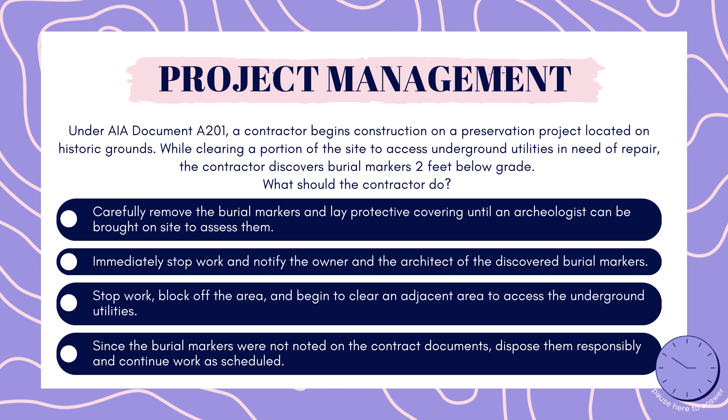And the answer is immediately stop work and notify the owner and architect of the discovered burial markers. As stated in AIA Document A201, the contractor must immediately suspend any work that would affect burial markers and notify the owner and architect. The owner will then need to obtain governmental authorization to resume construction.

The contractor is not allowed to start work until instructed by the owner. But that doesn't mean that they stop all work. The contractor is able to continue work in areas that are not affected by this discovery. This provision also applies to the discovery of human remains, archaeological sites, and wetlands not indicated on the contract documents.

Next up is programming and analysis. In a city where summers are characterized by high temperatures, a new office building aims to reduce energy consumption by utilizing natural ventilation and shading elements. What passive climatic design strategy should the architect recommend in this scenario?

Installing energy-efficient HVAC systems, constructing a green roof with vegetation, incorporating operable windows and sunshade devices, using thermal mass materials for building construction. Pause to answer.

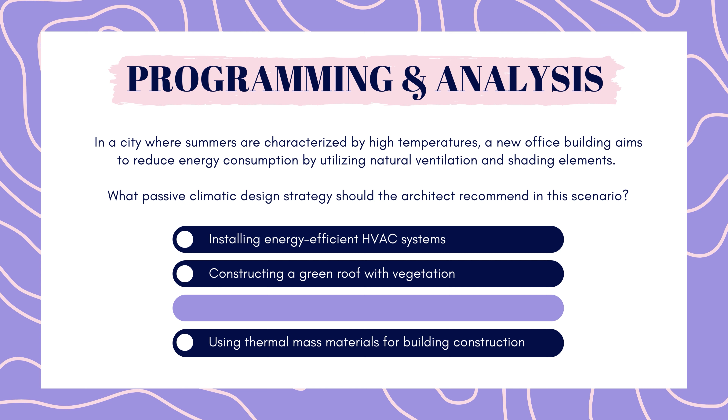And the correct answer is incorporating operable windows and sun shading devices. For this question, we're set in an area with high summer temperatures, so implementing passive ventilation and shading will aid in the occupant's comfort and in reducing the building's reliance on mechanical cooling systems.

Using operable windows will allow for natural ventilation, facilitating the flow of fresh air through the building to cool indoor spaces. Sun shading devices such as external louvers, shades, or awnings help to block direct sunlight, reducing solar heat gain and keeping interior spaces cooler.

Installing energy-efficient HVAC systems is great and will help reduce energy consumption, but it is not a passive system. Constructing a green roof with vegetation and using thermal mass materials are both passive design strategies, but they do not address natural ventilation or shading as asked for in the question.

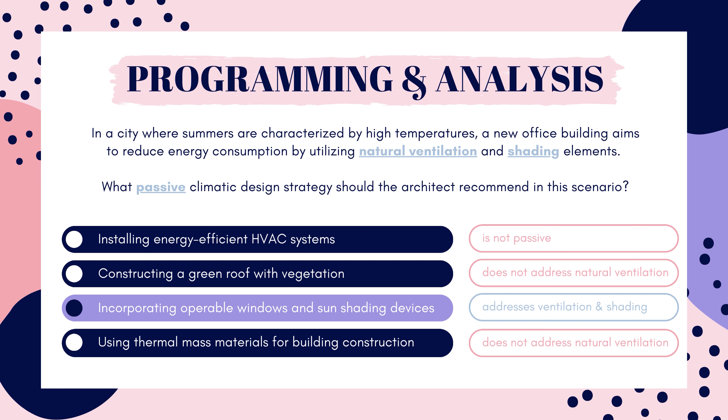Therefore, our answer of incorporating operable windows and sun shading devices is the best option, since it is a passive design strategy and addresses both natural ventilation and shading elements.

Our project planning question is, for a high security facility requiring robust door security mechanisms, which lock set would be most appropriate? Mortise lock set, pre-assembled lock set, bored lock set, or interconnected lock set? Pause here to answer.

And the correct answer is mortise lock set. Mortise lock sets are known for their robust security features and durability. They are designed to fit into deep pockets within the door, providing a strong and secure locking mechanism. They are also more complex in design compared to other lock sets, featuring multiple internal components and sturdy construction, which makes them more resistant to tampering or forced entry.

Clients also like this lock set due to its ability to be customized. They allow for various functions and configurations, including different cylinder options, multiple locking points, and the possibility of integrating additional security features. So for this scenario of a high security facility, mortise lock sets are typically used.

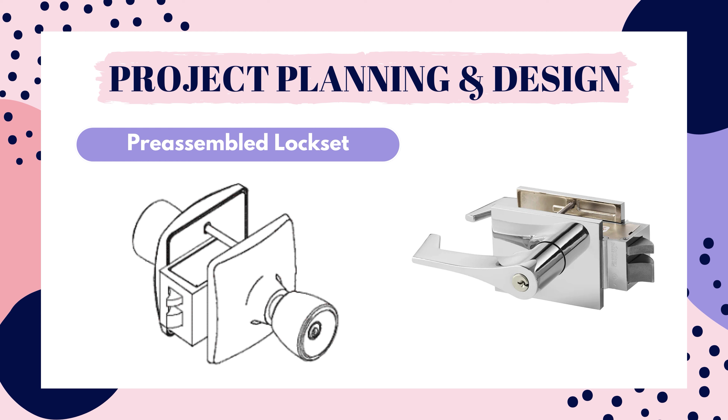Pre-assembled lock sets are convenient and easy to install since they come fully assembled and ready for installation, but they are not as durable and secure as the mortise lock set. A bored lock set refers to the way the lock set is installed. The contractor bores a hole into the door and installs the lock mechanism. These lock sets are less complex and do not provide the same level of security and durability as mortise lock sets for a high security facility.

Interconnected lock sets are just as they sound. It combines two separate locks into a single integrated unit. They typically consist of a lever handle and a deadbolt. This lock set has less customization and is not as durable as the mortise lock set.

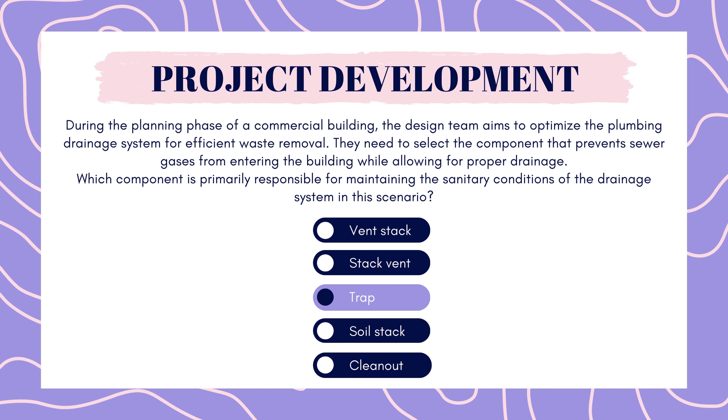And the correct answer is trap. Traps are essential components in plumbing drainage systems designed to create a water seal that prevents sewer gases and odors from entering the building. You may have found yourself annoyed with the windy pipes below your kitchen sink that prevent you from storing cleaning supplies in the cabinet. Well, that is a trap. As annoying as they are for storing items, they actually keep your house from smelling stinky.

They work by retaining water in a bend or a U-shape in the pipe, creating a barrier that prevents gases from backing up into the building while still allowing wastewater to flow through.

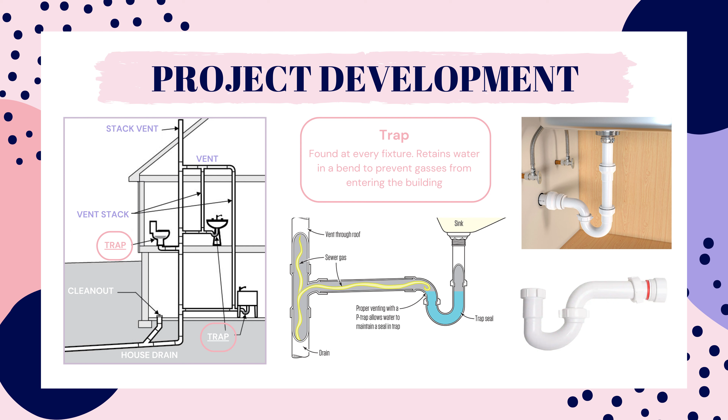A vent stack allows air into the drainage system to prevent siphoning of water from traps and ensuring smooth drainage. Remember, siphoning is when a liquid is pulled up due to pressure differences at different ends of the pipe. Vent stacks are crucial for plumbing systems, but they do not prevent sewer gases from entering the building.

Similar in name and function is the stack vent. This component also allows air into the system, but it is the pipe that you see poking out through the roof.

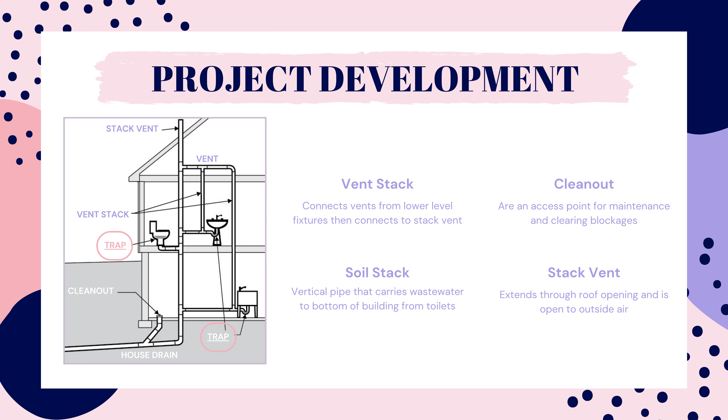Just like the stack vent does not prevent gases from entering the building. Soil stacks are vertical pipes that carry wastewater and sewage from toilets. They also do not prevent sewer gases from entering the building. And lastly, cleanouts are access points in the plumbing system for maintenance and clearing blockages. While important for servicing these systems, their primary role isn't to prevent sewer gases from entering the building.

Next up is construction evaluation. During the construction of a high-rise residential building, the contractor is required to submit documents that illustrate how specific building components will be fabricated, assembled, and installed. These documents are crucial for demonstrating compliance with project requirements and ensuring proper construction. Which type of construction submittal is primarily used to showcase the detailed fabrication and installation information for building components? Shop drawings, samples, product data, or installation instructions? Pause to answer.

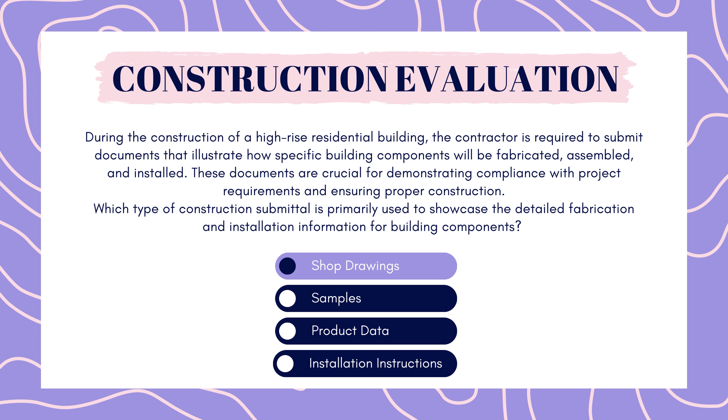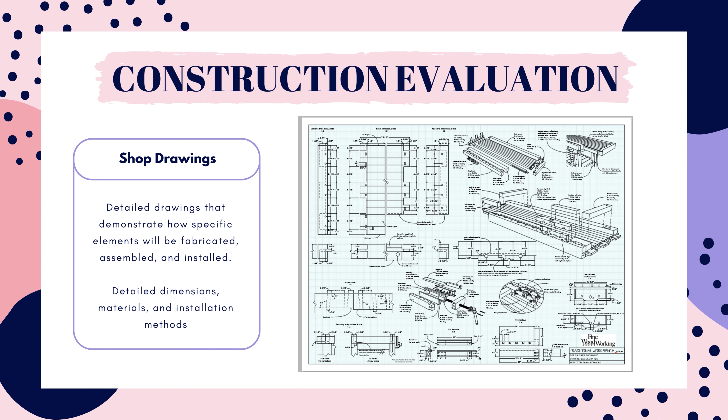And the answer is shop drawings. Shop drawings are detailed drawings provided by the contractor, subcontractor, or more typically by the supplier to demonstrate how specific elements or components of the project will be fabricated, assembled, and installed. They contain detailed information about dimensions, materials, installation methods, and other relevant details specific to the construction process. These drawings are crucial for ensuring that the construction aligns with the design intent and project specifications.

Samples are physical examples of materials, colors, or finishes proposed for the project. These are typically mailed or delivered to the architect to review. Product data includes information provided by manufacturers or suppliers about the materials, products, or equipment to be used in the project. It details specifications, properties, and performance criteria of the materials. These are typically included in the submittal review process and are typically delivered electronically as a PDF.

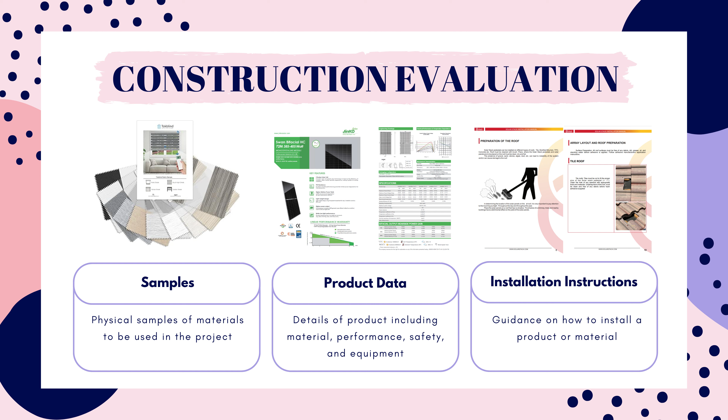Installation instructions offer guidance on how to install a particular product or material. They are typically not reviewed by the architect except in unique situations. Installation instructions are typically used by the subcontractor to ensure that they are installing the product as required by the manufacturer.

Last but not least, our bonus question is: in managing the construction of a new community center, the project manager consistently maintains a project notebook. The notebook serves as a central repository for project-related information. How does the use of the project notebook primarily benefit the project? Enhances project aesthetics and organization, improves accessibility and communication of project information, speeds up the decision-making process, simplifies the project budget tracking and financial management. Pause to answer.

And the correct answer is improves accessibility and communication of project information. A project notebook helps to store various project-related information, including meeting notes, milestones, correspondence, and site observations. This organized compilation ensures easy access to critical details, promoting effective communication among the project team members. I've seen a few project managers with different organization styles. I've seen some who keep one notebook per project, and others who use a single notebook for all projects, and everything is chronological, but they color code sections so they can quickly find a specific project.

I'm sure a lot of us have transitioned to some sort of digital notebook or software instead of a physical project notebook. But I think it's a good idea to always keep pen and paper with you, especially if you're out on site or at a client meeting, so that no important information is missed or forgotten. Then once you're back at the office, you can transfer it to something digital. Keeping a project notebook is a great tool to quickly reference essential information, facilitate better decision making, and coordinate among stakeholders and team members. That's our questions for this week.